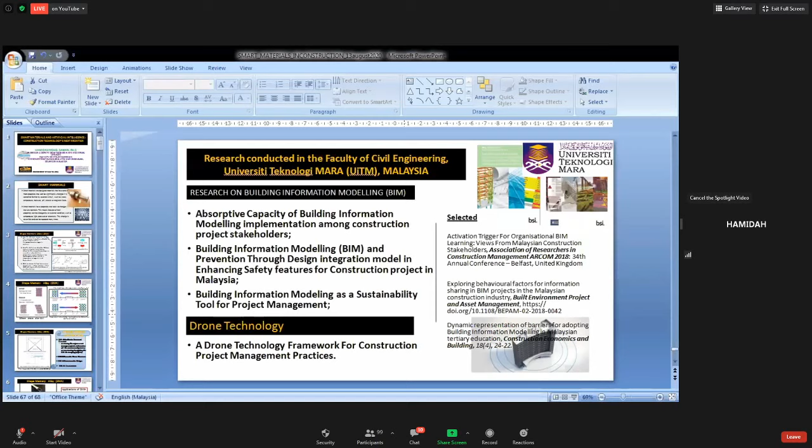Now, okay, can everybody see my slide? Yes, clear, Prof.

Clear, okay. So I would like to share small fractions of innovative materials and methods that have been made worldwide that have opened new doors for improvement in the construction industry, particularly in concrete construction in the Greenation era.

Good afternoon, ladies and gentlemen, everybody. Smart materials are defined as materials that have one or more properties that can be significantly changed in a controlled manner by external stimuli such as stress, temperature, moisture, pH, electric or magnetic fields. Smart construction materials are also known as intelligent, active, or adaptive materials.

One of the smart materials is shape memory alloy, or the acronym SMA. SMA has two unique characteristics.

One is a shape memory effect, and another is super elasticity, or known as pseudo-elasticity. SMAs are alloys that can return to their original form, shape, or size when subjected to thermomechanical or magnetic variations.

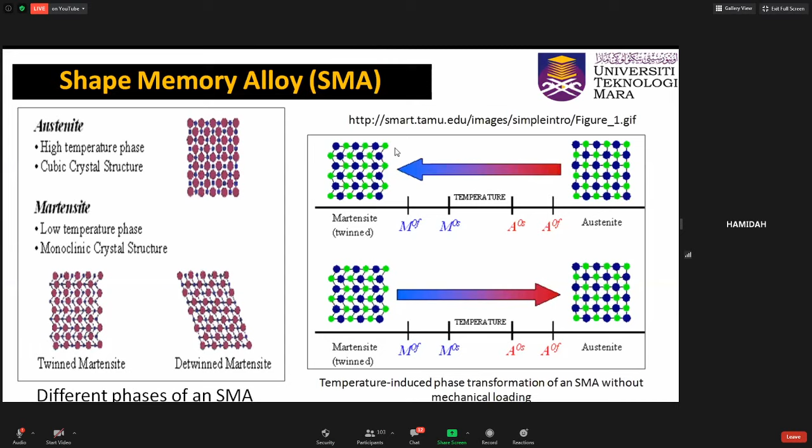Therefore, SMAs are still considered expensive materials. SMA find their application in civil engineering, specifically for seismic protection.

To date, SMAs have been applied in concrete structures to enhance shear resistance and reduce crack width for bridge girders. Nickel titanium shape memory alloy wires have been used to repair and strengthen heritage structures. SMA is also suitable for bridge restrainers that prevent excessive movement in bridge supports during a severe earthquake.

Another application of SMA in construction is as a base isolator. The SMA isolator usually provides energy dissipation and restoration after unloading. The isolators are installed between the superstructure and the ground to assemble an uncoupled system. Therefore, the damage of the superstructure is minimized.

SMA can also be embedded in concrete structures to reduce permanent deformation.

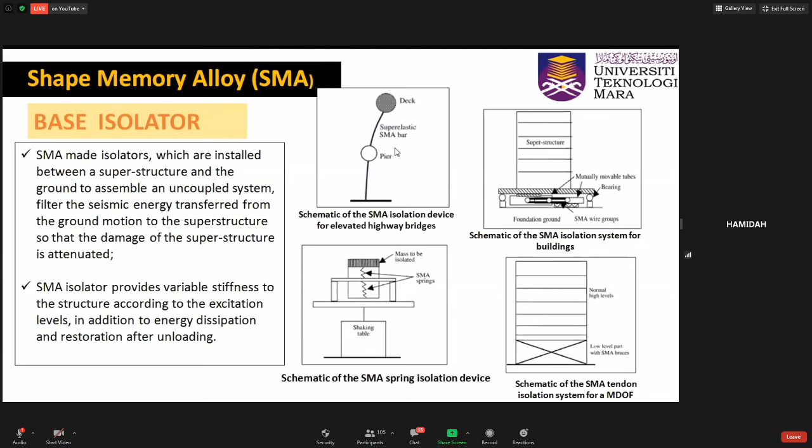Concrete has gone through evolution and revolution since the establishment of ordinary Portland cement in the 19th century. In the 1980s, use of blended cement became of interest to numerous researchers, with studies on the behavior of blended cement utilizing waste byproduct ash and aggregates, and at the same time self-compacting concrete was introduced. In the late 1990s, ultra-high performance concrete, also known as reactive powder concrete or RPC, was invented by a group of researchers from France.

Recently, categories of self-sensing, self-cleaning concrete using nano-sized particles, and translucent concrete under the term smart concrete have been topics of discussion. An example of self-sensing in ready-mix concrete is real-time concrete strength monitoring.

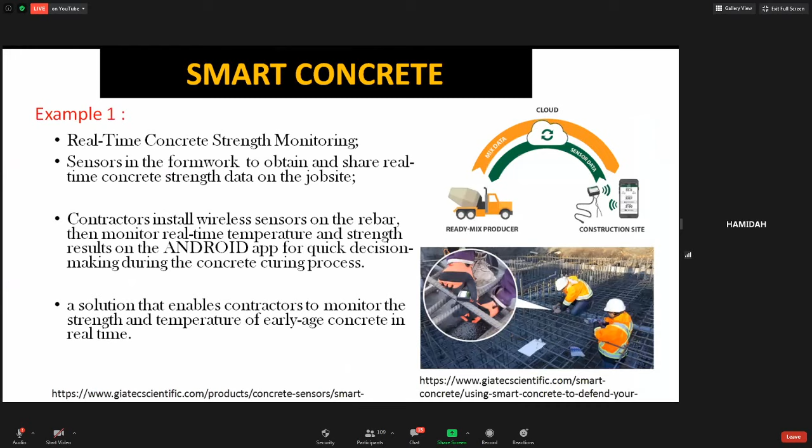Wireless sensors are installed in the formwork to obtain and share real-time concrete strength. Concrete incorporating carbon fibers or carbon nanotubes can also be used to sense strain, stress, crack, or damage by itself.

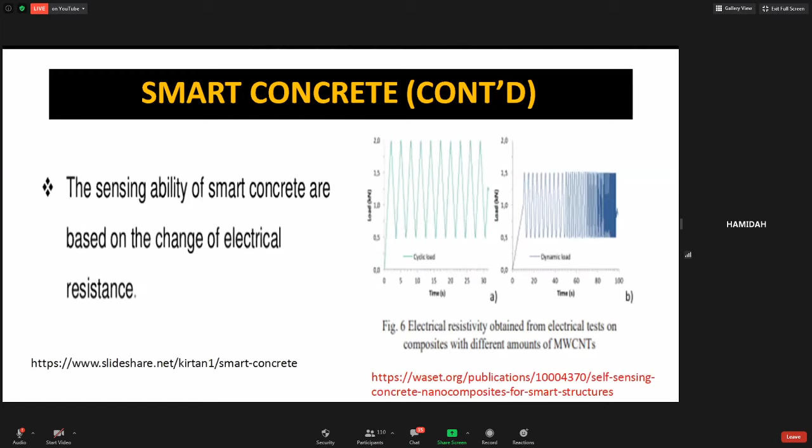The sensing ability of smart concrete is based on the change of electrical resistance. Carbon fiber has been proved to be one of the most effective ways to improve electrical conductivity, and is therefore embedded in hydrated cement paste. Carbon fiber in concrete can act as a self-sensing sensor through electrical resistance change.

Self-sensing concrete can also be used to monitor traffic flow and reduce congestion, and this can be done by integrating a signal from self-sensing concrete with an intelligent transport system.

In cold countries, self-sensing concrete can melt snow, as an alternative to using de-icing salts, which create many issues mainly around corrosion of steel reinforcement. The concrete is integrated with resistive carbon nanofiber paper, and heat will transfer to the surface through conductive concrete.

Nanotitania can disintegrate organic pollutants into harmless CO2 and water in the presence of light, making buildings stay cleaner and more beautiful.

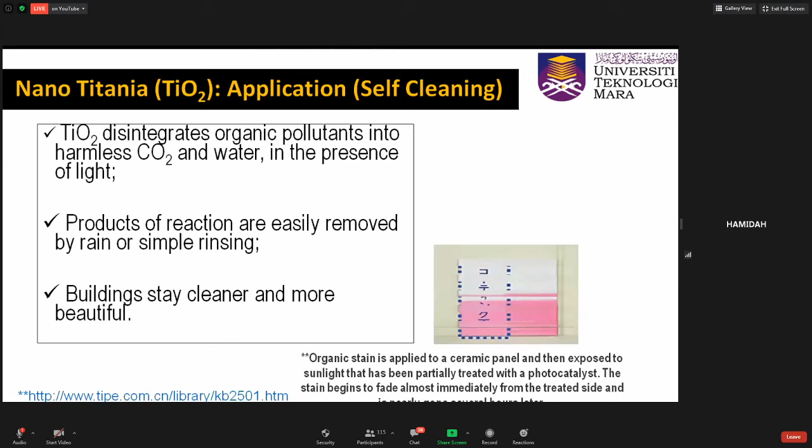Nanotitania acts as a photocatalyst for coatings that can preserve paint color for years and produces self-clean surfaces.

Meanwhile, Prof. Henk Jonkers and Prof. Eric Schlangen from Delft University, Netherlands, in the early 2000s had noticed that bacterial activities tend to self-heal by generating calcium or calcite precipitation, and their bioconcrete would have encapsulated bacterial spores that would be activated when cracking takes place.

It is a special type of concrete. Bioconcrete and self-healing concrete is formulated to increase durability and lifespan through continuous healing action. The bacterial species produce urease, which catalyzes urea to produce CO2 and ammonia, resulting in an increase of pH in the surrounding area, where ions of calcium and CO3 precipitate as calcium carbonate, also called calcite.

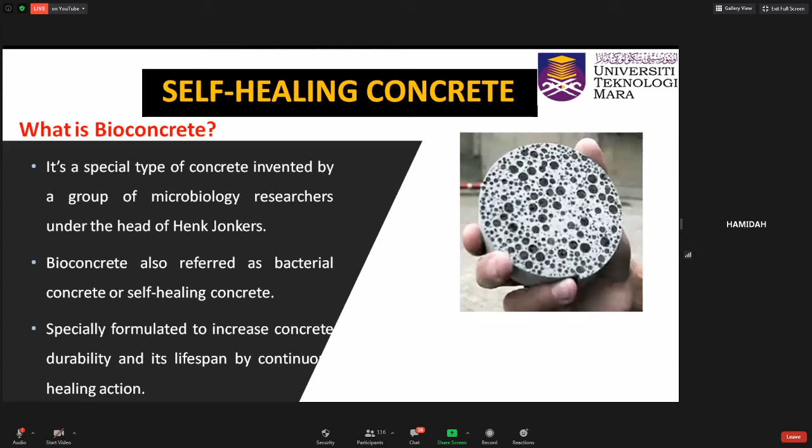Bioconcrete leads to sustainability because microorganisms can be regrown, and it is a new way to design durable concrete structures. The beauty about bacteria is that they become dormant in spore form when water and food are depleted.

But when the bacteria receive food and water, they will revive and become active, even after millions of years in a dormant state. With the introduction of nutrients and the availability of oxygen, bacteria can precipitate calcium carbonate to fill the microcracks. This technique is also called microbiologically induced calcium carbonate precipitation, or MICP.

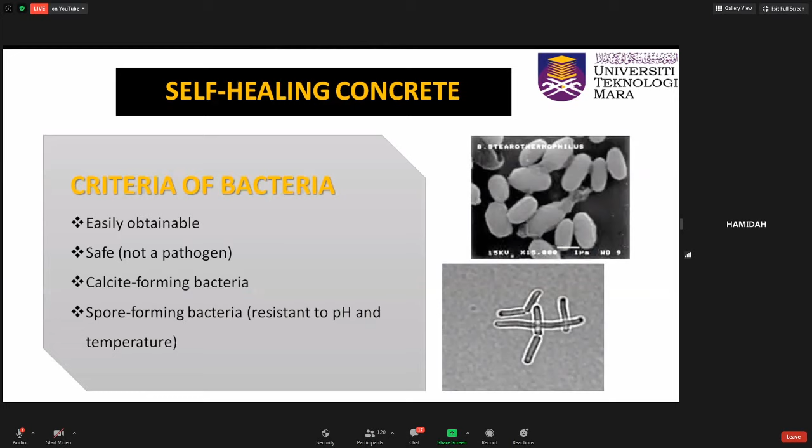Bacteria used for self-healing must be easily obtained, safe, calcite forming, and spore forming, and resistant to pH and temperature. The calcite formed from bacteria will fill up the voids in between the aggregates.

This is the illustration that can be made when calcite is formed in concrete. Ingress of water through cracks activates the bacteria, converting nutrients into minerals, locally clogging the crack to regain water tightness.

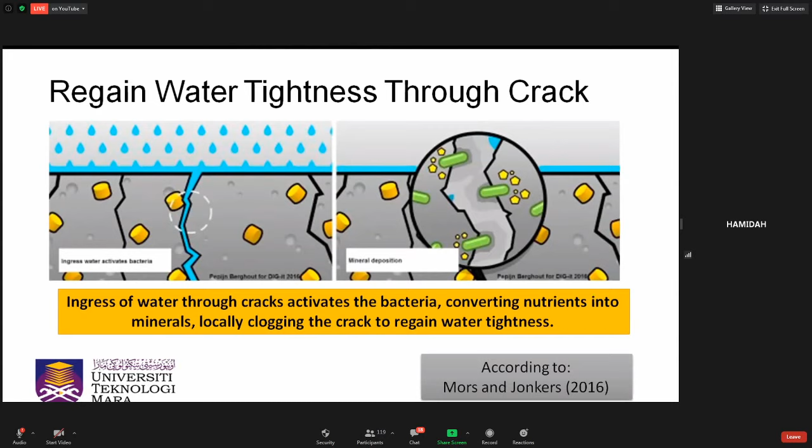Another method of self-healing is by using polymer catalysts. When cracks occur, microcapsules containing polymer healing agent break and release the healing agent. The healing agent contacts catalysts also embedded in the materials, causing polymerization and filling up the cracks.

Research has been conducted in the Faculty of Civil Engineering, Universiti Teknologi MARA, on self-healing concrete using Geobacillus stearothermophilus encapsulated in alginate gel. The encapsulated bacteria was mixed in concrete and artificial cracks were introduced. It was observed that the cracks will fill up in 60 days.

The study showed that encapsulated bacteria can heal a maximum crack width of 0.97 millimeter compared to direct incorporation of bacteria, where only smaller crack widths can be filled up.

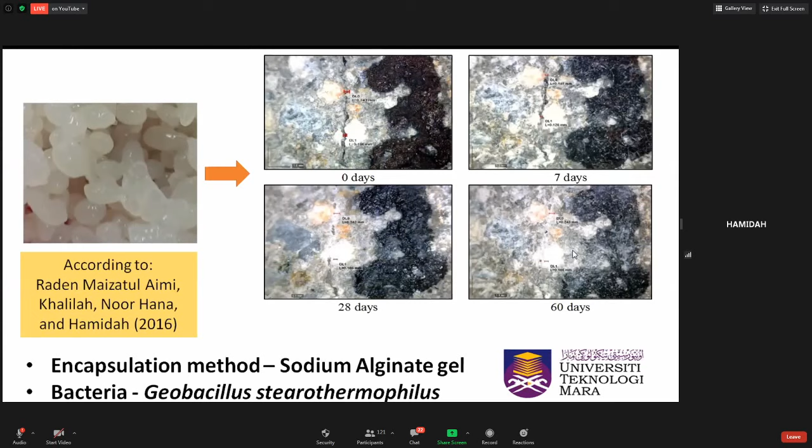Meanwhile, nanoconcrete is defined as concrete made by filling the pores in traditional concrete using nanoparticles of size less than 500 nanometers. The nanoparticles will provide special performance.

Carbon nanotube possesses superior mechanical properties, besides its very low density, making carbon nanotube one of the popular nanomaterials selected to be incorporated in concrete.

Nanomaterials are categorized into two: graphene and nanoparticulates. Graphene includes carbon nanotubes, or CNT, and carbon nanofibers, or CNF. Meanwhile, nanoparticulate materials include titania, silica, calcite, and clay.

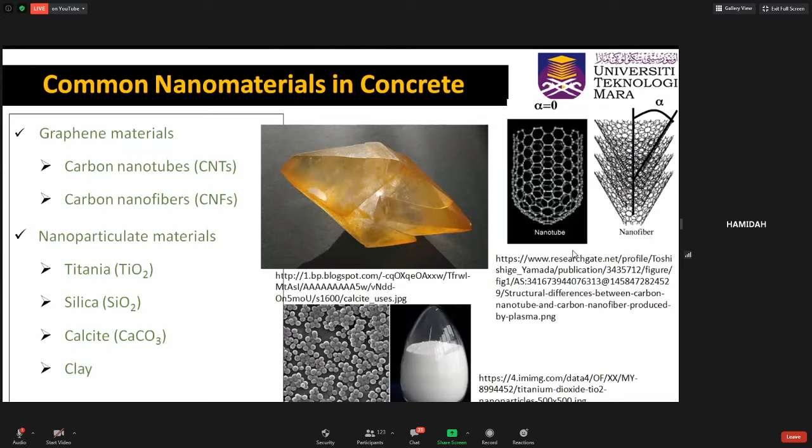Graphene is a monolayer of carbon atoms packed into a honeycomb lattice. Graphene layers can be wrapped into perfect cylinders.

Carbon nanotubes, or CNTs, have a diameter of 1 to 2 nanometers and length up to 18 centimeters. They have extraordinary strength and excellent electrical and thermal properties, making CNTs the best of known materials as compared to high-carbon steel.

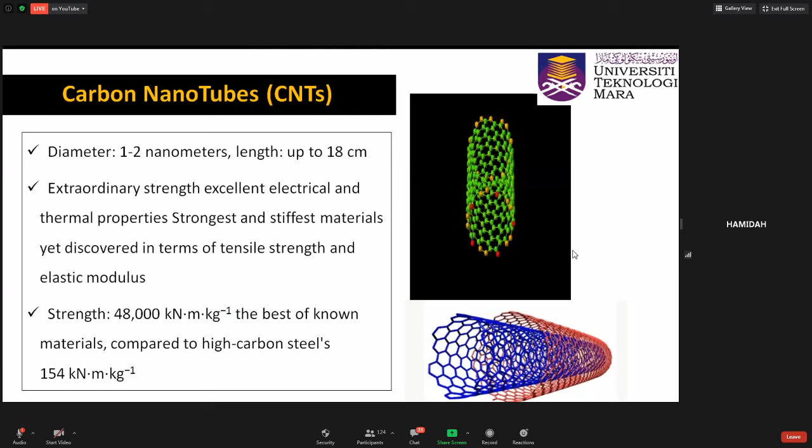CNTs fit many applications in infrastructure. CNTs have strength hundreds of times that of steel and can be employed as rope in suspension bridges. Some scientists are even working on a space elevator that uses a CNT rope to take us all the way up into space.

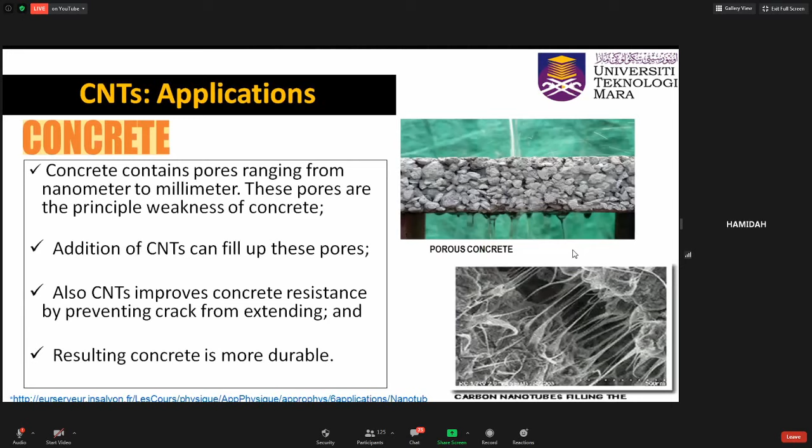CNTs have been used to fill up pores in concrete ranging from nanometer to millimeter size, resulting in more durable concrete. Owing to greater strength and lesser density of CNTs, it can offer an excellent replacement to conventional steel in cable-stayed bridges.

Carbon nanofibers, or CNFs, are fibers with diameter in the range of 10 to 80 nanometers. CNFs are cylindrical nanostructures with graphene layers arranged as stacked cones, cups, or plates, or even as coils or ropes.

Besides, it can be a photocatalyst as a self-cleaning agent. As mentioned earlier, nanotitania, when exposed to UV light, will create hydroxyl radicals and superoxide ions, which are very strong disinfectants as a cleaning agent.

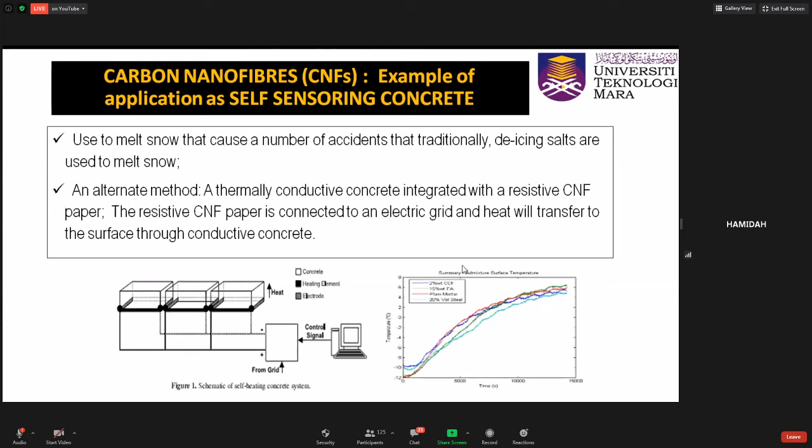Nanosilica, because of its cheaper cost, is the most commonly used. Silica is found in nature as sand. Nanosilica particles range from 10 to 20 nanometers. When incorporated in concrete, nanosilica would fill the pores at nanoscale, resulting in increased compressive strength and improved resistance towards segregation.

While calcite is a common carbonate mineral, the second most abundant after silicates, the size of the nanocalcite particle exists in the range between 60 to 150 nanometers.

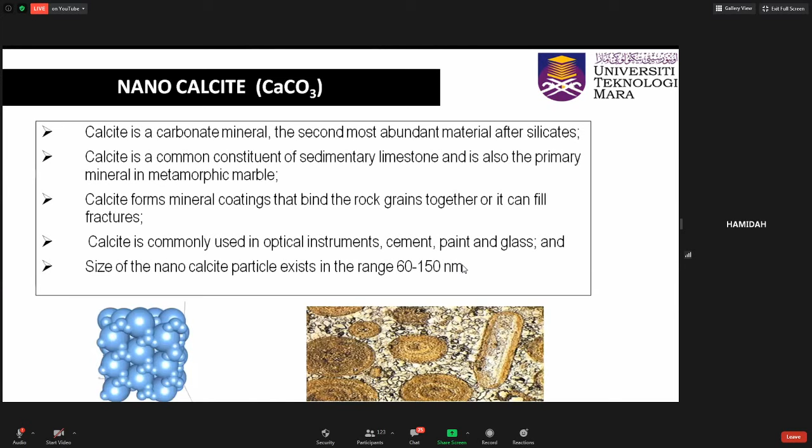Nanocalcite is a very important filler material like nanosilica and can be used in sealants and adhesives to improve stiffness, resistance, and weatherability of the resulting composite. Owing to its glassy texture, calcite also imparts glazing to paints.

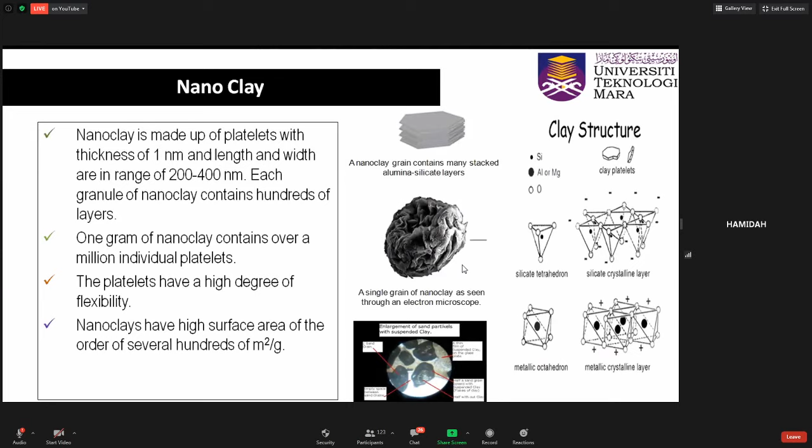Nanoclay is made up of platelets with thickness of 1 nanometer and length and width in the range of 200 to 400 nanometers. Each granule of nanoclay contains hundreds of layers, and 1 gram of nanoclay contains over 1 million individual platelets.

Nanoclay is added to concrete as a replacement of cement material. It was found that tensile strength of concrete increased by 50% if 8% cement is replaced by nanoclay. Nanoclay is also used as a rheological modifier in paints and increases flowability and plasticity when added into concrete mix.

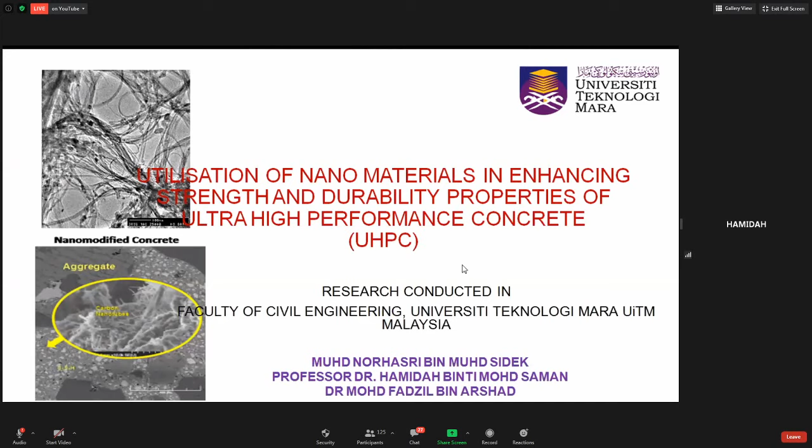Research works have been done in the Faculty of Civil Engineering, Universiti Teknologi MARA, UiTM, on utilization of nanoclay in producing ultra high performance concrete, or UHPC. A series of trial mixes were experimented to determine the optimum formulation with high workability UHPC, incorporating nanometaclay and nanometakaolin.

It is an objective of the study to establish ultra high performance concrete made of nanometaclay or nanometakaolin with water curing but able to achieve similar strength as UHPC made of other materials cured in elevated conditions. The function of nanometaclay or nanometakaolin is obviously to fill up pores at nano size in concrete.

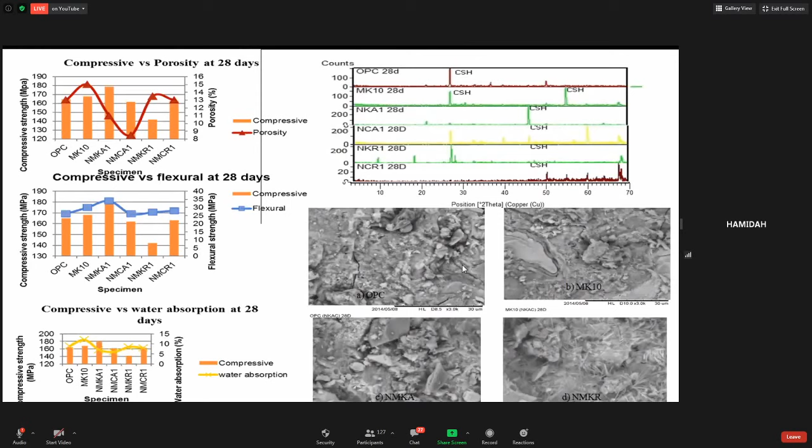The results show that nanometaclay has flaky and granular morphology. It shows that 1% nanometakaolin is enough to boost the compressive and flexural strength to maximum level of the UHPC prepared. Interestingly, the compressive strength achieved is equal to those made with higher cement content cured under heat treatment, when nanometaclay or metakaolin is included in UHPC.

Similarly, flexural strength obtained is equal or higher despite the lower cement content used. It is confirmed that inclusion of 1% nanometakaolin and 1% nanoclay enhanced the compressive and flexural strength, and both strengths were achievable from UHPC specimens cured in water.

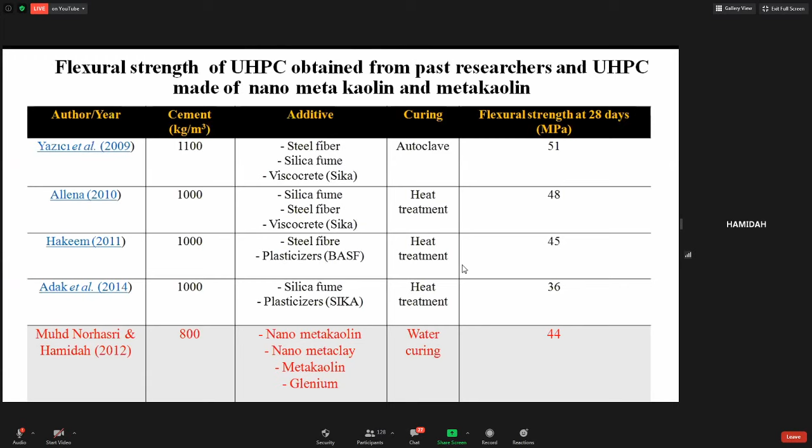Another smart material is translucent concrete, another example of smart concrete. It is also called transparent or light-transmitting concrete.

It is achieved by replacing aggregate with transparent alternative materials, for example clear resins and other types of resin. Translucent concrete was originally developed in 2001 by a Hungarian architect.

Transparent concrete is manufactured by using a combination of fiber optics and fine concrete. These fibers are blended into the concrete like any other aggregates.

These optical fibers can transmit light from natural and artificial sources into spaces enclosed by the translucent concrete panel.

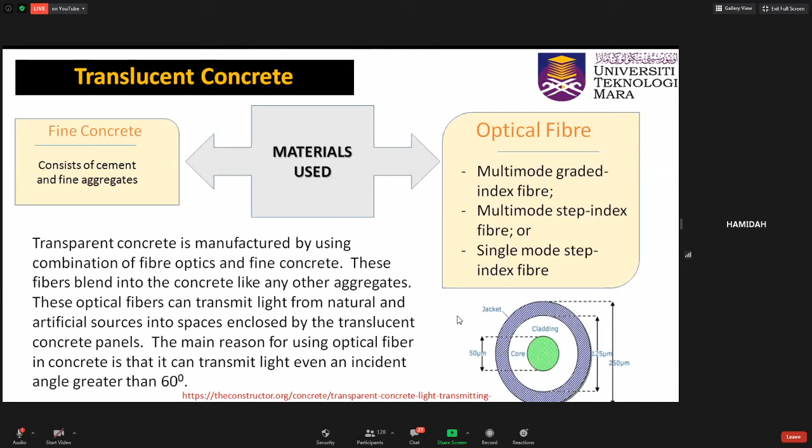The main reason for using optical fiber in concrete is that it can transmit light even at an incident angle greater than 60 degrees. Optical fibers in concrete act like slits which pass light throughout the concrete.

Translucent concrete offers many advantages such as a good aesthetic view to the building, and it saves energy costs if sunlight is used as the light source instead of electrical energy.

It can also be used in cold weather countries to transmit heat with sunlight.

Artificial intelligence, or AI, assists humans and does not replace them. AI uses the power of machines to model the natural intelligence of humans.

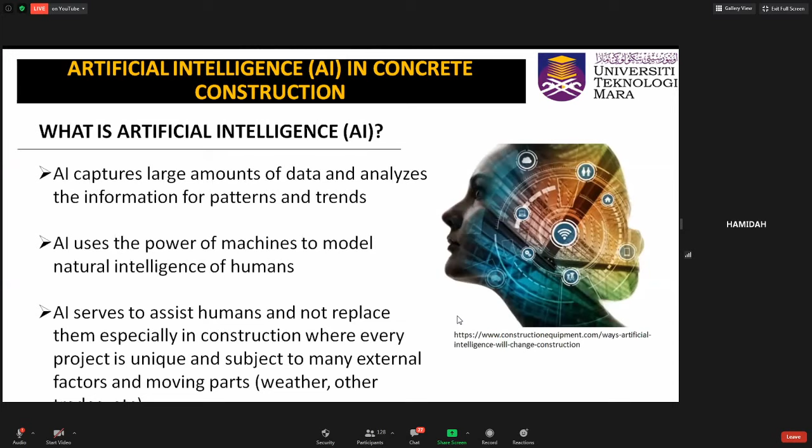For example, drones provide easy access to monitor construction sites and workers at large and difficult or complex areas.

A drone can gather images, aerial data, and mapping information, and is used to capture 3D modeling for building information modeling, or BIM.

BIM creates a shareable digital description of every aspect of the structure, which all necessary stakeholders can update.

BIM offers solutions regarding cost estimation, design workflow, life cycle management, streamlined information, documentation, and also maintenance.

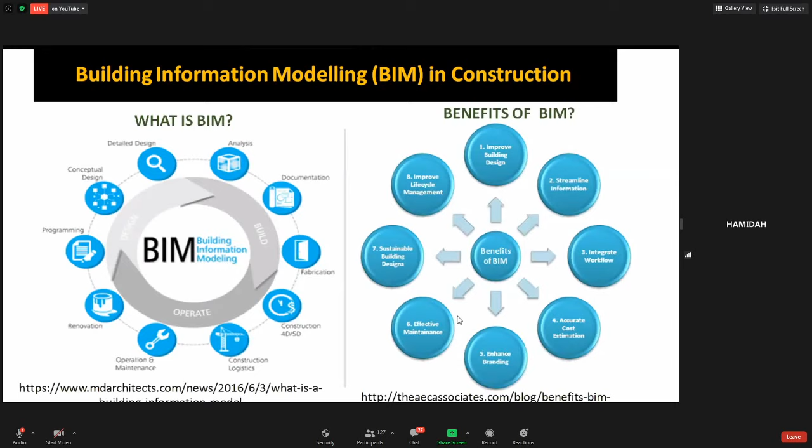A few research projects in relation to drone and BIM are ongoing in the Faculty of Civil Engineering.

We have a group of researchers conducting research on BIM and drone technology, and a few papers have already been submitted and published in the journal, a high impact journal.

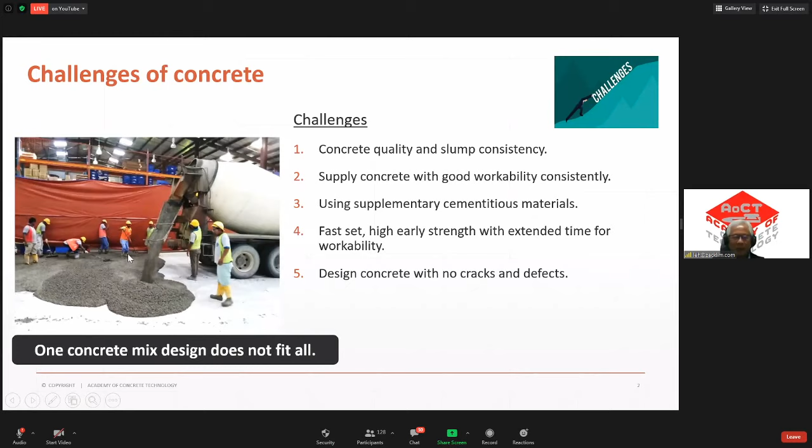I'll talk about some of the advantages and disadvantages on that. Today everybody wants their job to be done fast. And the final thing is a little bit on the mix design of concrete, where if you can have no cracks and defects, maybe just now with all the nanoparticles mentioned by Prof. Hamidah, might make it very interesting for the students to look into the research. So the first challenge is concrete quality and slump consistency.

What I mean here is I'll show you a video of a concrete floor. A concrete has been supplied for us to do a floor. And if you look at the video, certainly this concrete is really, really wet, all right? This concrete actually looks like a self compacting concrete or self flowing concrete.

So I always say that you're getting it at the same price as a normal concrete, but ended up you get, but it's not the true self-compact or self-flowing concrete, it's just such bad concrete. Sorry, I hope you can hear me. Some interruption.

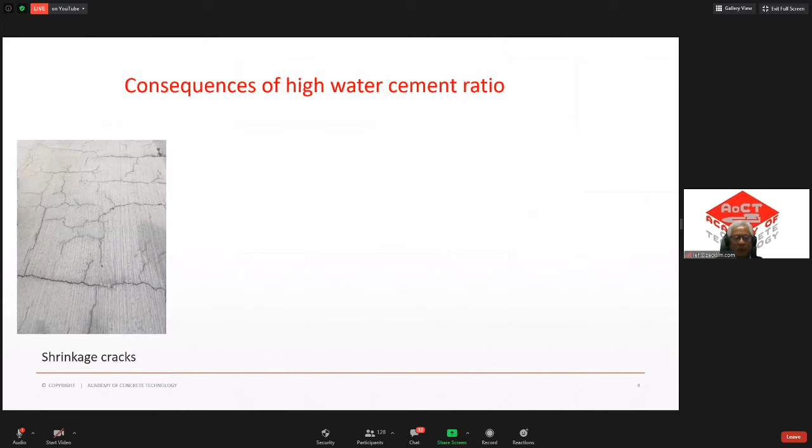Yes, we hear you. Okay, all right. So these are the consequences of a high water cement ratio. The first thing is shrinkage crack. As you know, shrinkage crack would always come many months later, because the water escapes from within the concrete, and that's where the stress and strains will build up within the concrete. And being the concrete very young, it might not have the strength to fight the stress and all that. So that's why for sure, any wet concrete delivered to the job site will have a lot of shrinkage crack. The second thing could be craze crack.

You see a lot of spider cracks on the surface. And this is not so much caused by the water, but because when it's so wet, most of the time the workers have to sprinkle cement on the surface. One way of sprinkling the cement is to suck up the water so they can go in and finish off the job early. So when you have too thick a paste, due to the difference of drying or the temperature, the skin or the surface will always dry up much faster than within. As a result, it's due to the differential of shrinkage, that's why you have a lot of these cracks on the surface. But all these are not actually structural, it's just aesthetic. It doesn't look good, but it will never actually peel or delaminate.

It's just unsightly. So the third thing is actually the surface can be very dusty and weak. You got very low abrasion resistance and all that. And of course finally, your compressive strength would definitely drop, as you know. The more water you have in concrete, for sure your strength would definitely drop. So these are the consequences of having very, very wet concrete.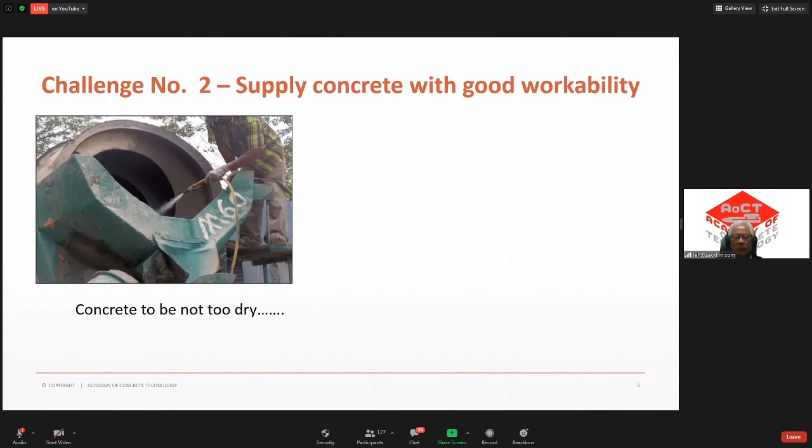They add water. So these are the earlier batch they have done, looks good, workable. And this is after adding water, you can see how wet the concrete is. So beside all the consequences I mentioned earlier, sometimes because this concrete has already started, it will definitely set much faster, and being wetter, it will definitely set slower. As a result, you might have what we call a cold joint.

Normally, cold joints are caused by disruption or delay of concrete supply. Let's say you place this concrete, and after 2 or 3 hours there's no supply, then the fresh one comes in. The fresh and the old hardened concrete would not intermix. As a result, after many months, as the concrete starts to shrink, you tend to have a crack line appearing there. So these are the reasons why you need very good workability of the concrete, so that the workers don't add in water.

The third challenge is, as you know today, all these supplementary cementitious materials - the common ones are fly ash, slags, and silica fumes. Especially for students, you know that all these ashes are based on the dump site, and today they're used to substitute the cement. So with all these supplementary cementitious materials, you actually enhance properties of the concrete.

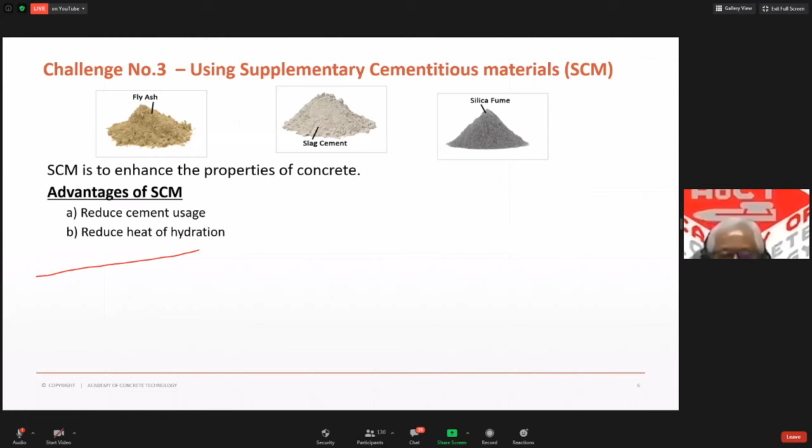The second thing is it actually reduces heat of hydration, especially when you're doing very thick slabs - maybe about a meter thick. So when you do any thick concrete using OPC, what happens? The heat of hydration - the core of this slab, I'll show you in the next picture. For example, you're doing a pile cap, it could be 1 meter thick, or even a basement slab. What happens when you're doing such a thick slab using OPC is the heat generated within the center of the core can probably easily reach 70 degrees C. And your ambient temperature, let's say, is 30. So there's a difference of 40 degrees C.

As a result of that, you will get thermal cracks. Most researchers say that if you got anything more than 25 degrees C difference between the core of the slab and the ambient temperature, you will have thermal cracks happening.

Besides that, another type of crack can happen, called delayed ettringite formation. As you know, during the cement hydration process, a lot of these ettringite, which are kind of like crystals, start to develop. But sometimes it delays the ettringite from forming. So what happens is that after many years, around 10 years or so, in the presence of moisture, this ettringite, when in contact with water, that's where they will start to crack. That's a little bit why adding all these SCMs would definitely help with thermal cracks. At the same time, it will also create cracks - I'll talk about that later. So these are always the plus and minus points of it.

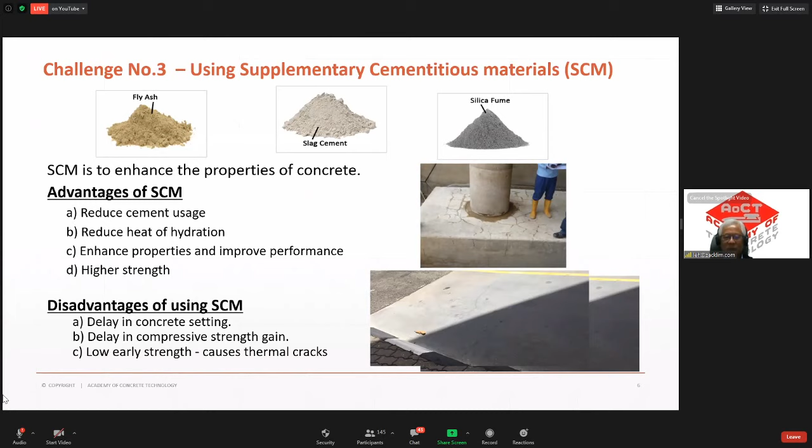The other thing is it's very costly. For normal concrete, 1 meter cube might cost like 60, 70 USD. For high strength fast set repair concrete, it might cost as much as 2,000 USD per meter cube. So we see the big difference.

And of course the third thing is there's a lot of demand, because everybody wants to do their work faster. They want to turn over their formwork, especially the precast people, so there's a lot of demand for fast set concrete. But because of the price and fast setting, I always tell researchers they should work on this type of fast set concrete not only for repair but for new projects too. The latest I heard is that researchers can do like 20 MPa within 8 hours, and the price is only about 1/4 of what I mentioned, so I hope you all continue looking into this research.

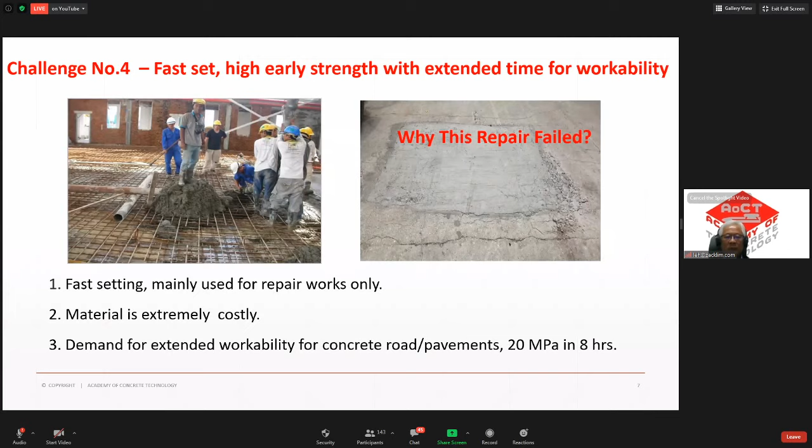So try to use as low water cement ratio as possible, right? And you all know very well that if you don't have enough water, you also will cause autogenous shrinkage cracks. So playing around with this, what we found is for the mix design, if you can keep your water between 145 to about 180 kilos per meter cube. That's subject to your cement again, and that's very important.

Another thing, even too much cement could be bad, because we always try to cap our cement content below 400 kilos per meter cube of concrete. The reason is if you've got higher cement than that, it might cause curling of the floor slab. The slab will actually curl up. So that's another type of defect.

So the second thing you should do is add in a shrinkage compensating agent, right? It could come in liquid or powder form. What this shrinkage compensating agent does is, when you add it into the concrete...

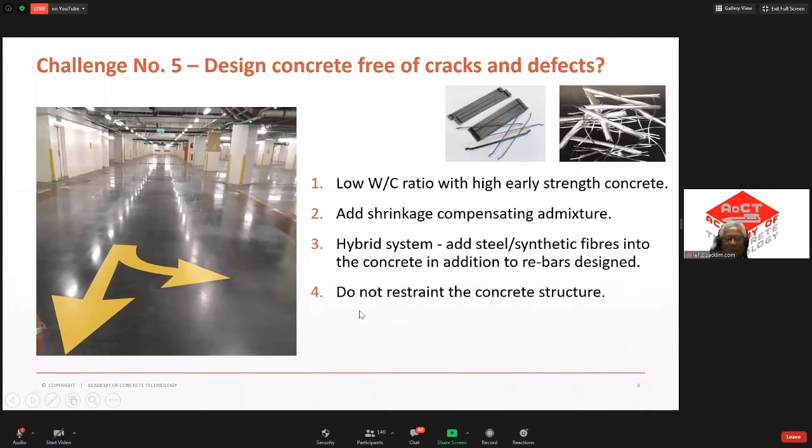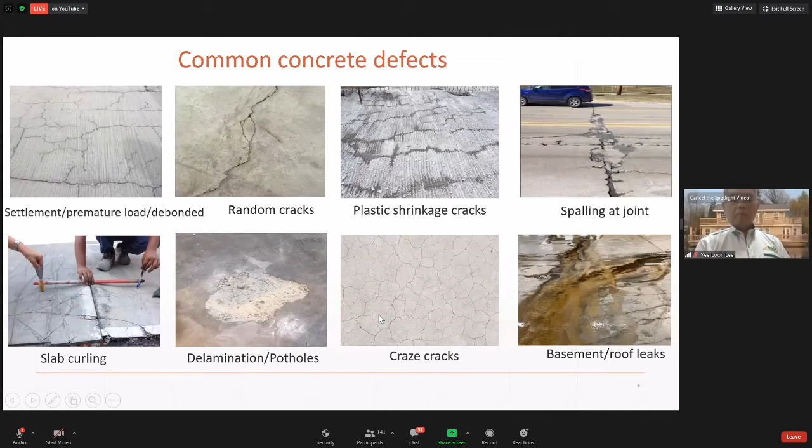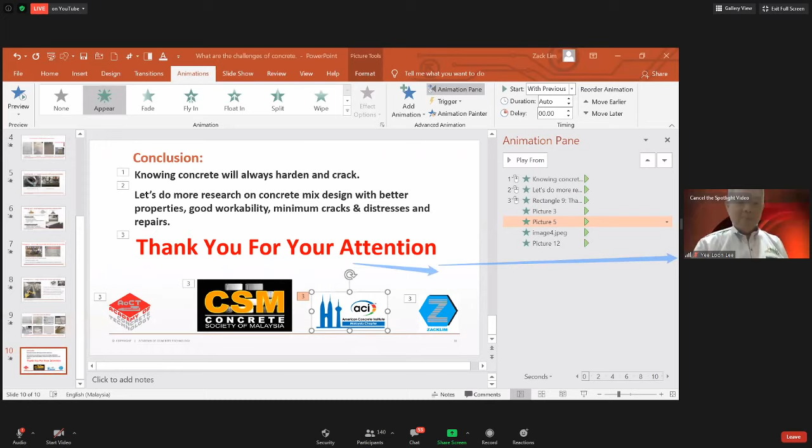Thank you for your very good and valuable presentation. I have one question: translucent concrete is really very good in terms of its use in dark areas, basements, and many other areas, but I would like to know to what extent the fibers used in this concrete create an impact on its strength. What type of fiber is used for translucent concrete? How do these fibers affect the strength of the concrete?

Frankly speaking, this is an area where I'm interested and I'm still doing a review because I haven't started any work yet. But based on my literature review, it says that optic fiber is used. There are a lot of optic fibers, and this optic fiber is put inside, slit inside the concrete, and it can produce light inside the concrete.

My interest was to know whether these optic fibers create some contribution, positive or negative, towards the concrete's strength. That was the question. Frankly, I haven't looked into the effect of this optic fiber on the concrete properties yet. Thank you very much, Dr. Arif.

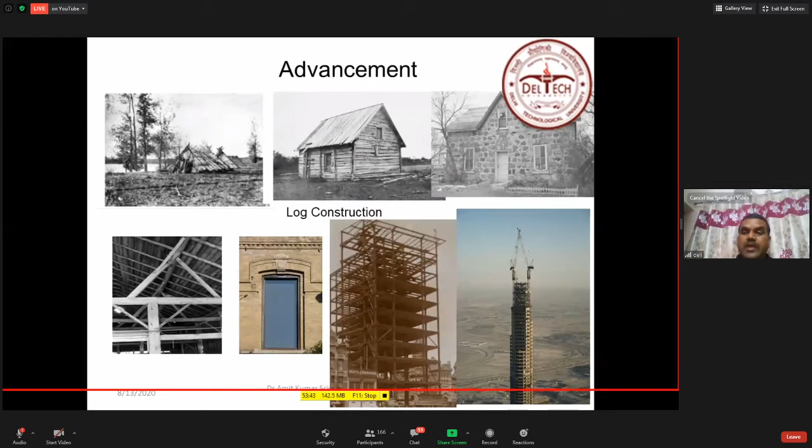Advancement is bound to happen; it is the law of nature. As people were advancing, our construction industries were also advancing, from the log to brick masonry or stone masonry structures, wooden structures, then to steel structures and concrete structures. Even though steel structures perform better, in India concrete structures are more preferred, and I may not be wrong if I say this is true worldwide too. Concrete structures are more in demand and use because of flexibility, ease, and the trained manpower available in this area.

Since I am talking about Indian case studies, let's look at world cement production in 2018: China is first with 57.3% of resources, and India comes next with 6.2%. China is the world's largest cement producer, and India's production is about one-tenth of that, at 6.2%. We are the second largest producer and user of cement in India, which is not surprising because we are a developing country with high cement demand.

As I said, more and more we are going for construction using reinforced cement concrete, so more and more cement demand is there. We are at the second position in the world.

Similarly, if you see the share of different industries in carbon dioxide gas emissions, the cement industries alone are producing 6.9% of total global carbon dioxide emissions. If you see all the trucks in the world, they are producing 6.1%. It means the cement industry is producing more carbon dioxide than all the trucks on the road produced in 2017.

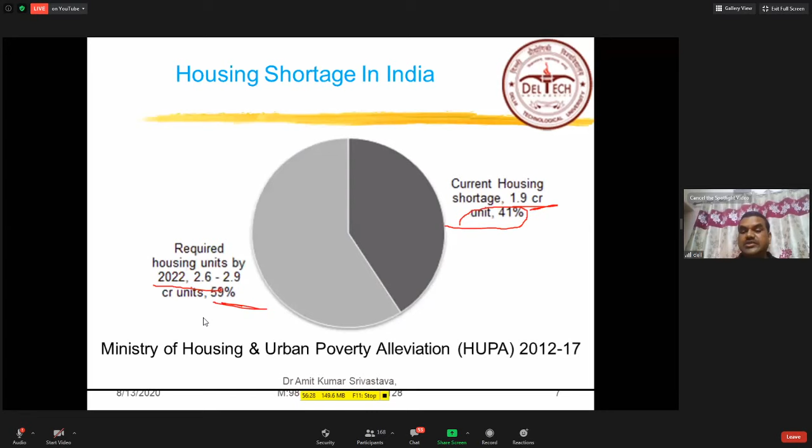Now you see, we have a 59% shortage, and as I said, mostly we are going for concrete structures. And if I'm going for concrete structures, lots of carbon dioxide gas emissions will be there. This is the background of my study.

Then we will discuss what sustainability is. As you know, the World Commission on Environment and Development in 1987 defined sustainability as that which meets the needs of the present without compromising the ability of future generations to meet their own needs. So what I want to say here is that we should not exploit our natural resources in such a way that our coming generations will be deprived of them.

Our cement, because in India we are having a shortage of raw materials to make good concrete and good cement, and sometimes we are procuring and importing it from Pakistan, China, Korea, and so many other places. And 59% of the development we still have to do, so we are lagging also. So now, how do we use this precious material in such a way that I can preserve it for future generations, and what methods can the cement concrete industries implement to reduce its use? That is the topic I'm going to discuss today.

So now, how can I achieve sustainability in construction? The best way is to use less and work more—less quantity, more work, will probably be the better answer to this question. If I use less quantity while achieving more, our carbon dioxide gas emissions will also be less, and moreover, I can preserve these beautiful raw materials for coming generations. I'm afraid that if we don't do this, coming generations may see cement only in a museum.

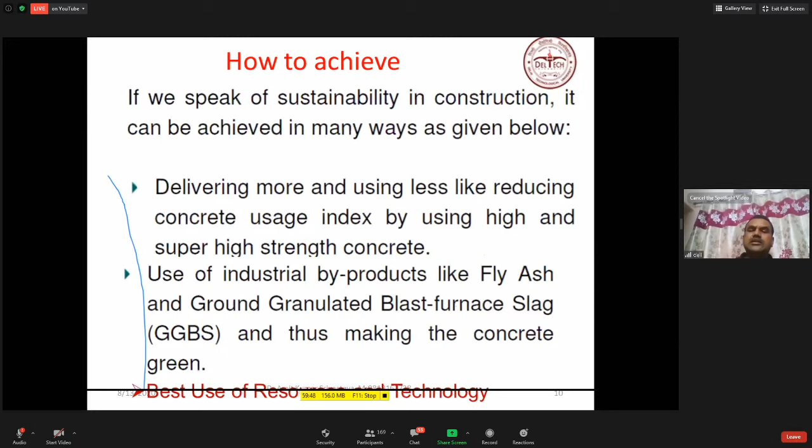After all, whatever you are doing, you have to have the best resources and best technology to use it. If you design properly and use very good quality material, but the handling at sites is not good, you are not going to achieve anything. So you have to use the best technology and resources.

Now, if I come to this slide, you see how to achieve it: reduce, reuse, recycle, and recover. These are the four principles of environmental engineering, and mostly the concept I'm going to discuss here is reduce and recycle. I'm preventing material from going into landfill sites, so I am trying to use waste material for concrete production.

So what I want to reduce here is the use of potable water used for concreting and curing. We have scarcity of good drinking water, and whatever water is required for making concrete and for curing needs to be good quality water. So how do we reduce the water requirement in concrete, and then reduce the use of raw materials like ordinary Portland cement, and use proper technology so that implementation is better and structures are defect free.

Now I will give a brief idea, because I think some students or research scholars are also there in the presentations from India and from different parts of the country. So I just want to discuss the different cement manufacturing processes.

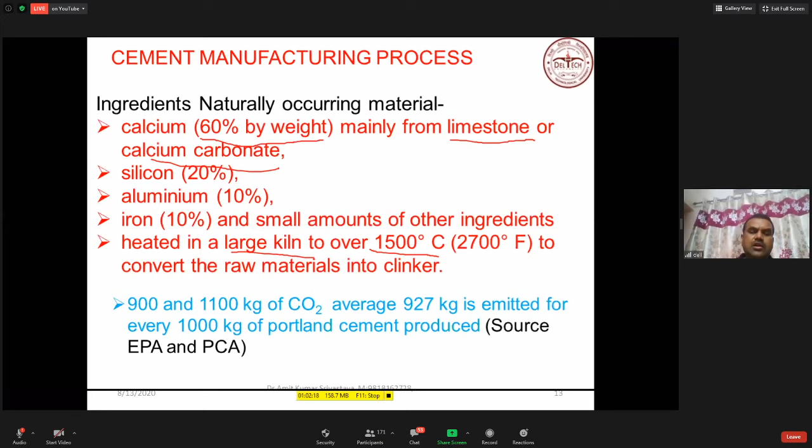And during this process, what happens? There is too much carbon dioxide gas emission. Research, and even our universities, are finding out the carbon index of every material used in buildings or infrastructure projects. Research says that about 900 to 1100 kg of CO2 is produced, about 927 kg of carbon dioxide gas is emitted.

So if I produce about 1000 kg of cement, I'm going to produce about 900 to 1100 kg of carbon dioxide gas emissions. So on average, about 927 kg is emitted for every 1000 kg of Portland cement. If I generalize it, I can say 1000 kg of Portland cement will produce roughly 1000 kg of carbon dioxide gas. It means 1 kg of cement produces about 1 kg of carbon dioxide gas. So if I save 1 kg of cement, I reduce the burden of carbon dioxide emissions by 1 kg. It is nearly an equal ratio.

Whatever cement you use, a similar amount of carbon dioxide gas is going to be emitted. How much carbon dioxide gas will be emitted depends upon the technology and what type of fuels are used in the process. Now let's see how this carbon dioxide gas is emitted.

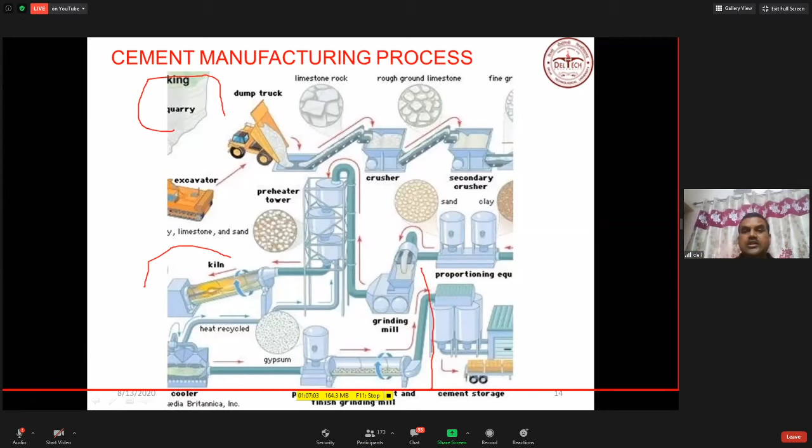Now this elaborated process causes emissions of carbon dioxide gas at the rate of about 1 kg per 1 kg of cement. Now if I want sustainable growth, if I want to reduce the carbon dioxide gas, what do I have to do? I have to reduce the use of ordinary Portland cement. And if I'm reducing ordinary Portland cement, it is not only reducing carbon dioxide gas emissions, it is also saving cost, because ordinary Portland cement is a costly material.

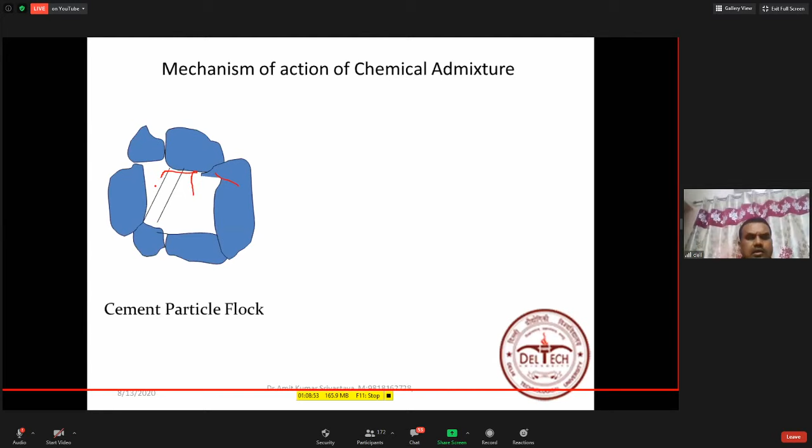Now what happens when we put chemical admixtures into this? What it does is make the cement particles negatively charged. Once the cement particles get negative charge, there is a repulsive effect, and whatever flocks are there, in these flocks, when water comes in, this water gets clogged here. This water is clogged here. So when water is clogged, what does that mean? This water is not available for the reactions.

So what happens when we add chemical admixtures is the cement particles get negatively charged and have a repulsive effect, and the water which was trapped inside the cement particles and not participating in the reactions is now released and available for the reaction. Now you see this diagram, it will explain properly how this water is getting released and becoming available for chemical reactions. This is the main concept of chemical admixtures. Various researchers have explained the same thing in different ways and different theories, but this is the easiest way I can explain chemical admixtures and how they reduce the use of water into the concrete.

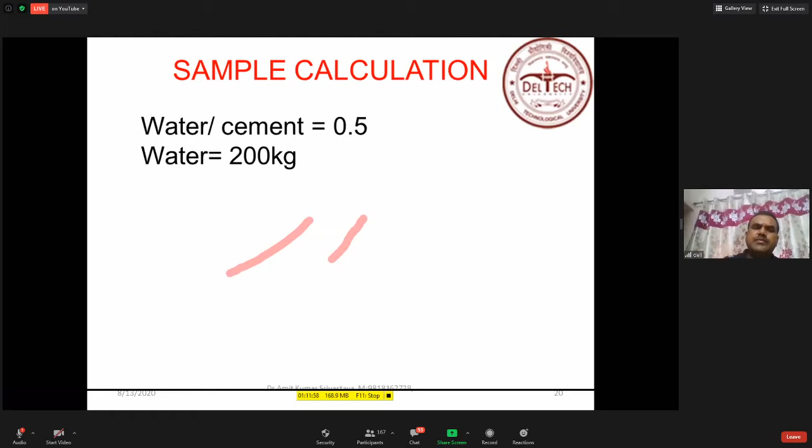So normally water required is 200 kg, I am just assuming. It depends upon the slump, the flow, what you require. It may vary a little bit, but whatever grade of concrete you are going to manufacture, for the same workability and the same slump or flow, you have to keep the water requirement the same or constant. So water requirement is 200 kg.

Now if I say the water cement ratio is 0.5, then what cement do I require? I will be requiring cement of 400 kg. Now the role of chemical admixtures comes in.

So now we add chemical admixtures. In the market, if you see, there are different generations of chemical admixtures. That is called a super plasticizer, or it is also called a water reducing admixture. Some admixture gives you water reduction of 20%. Some gives you 35%. Some gives you 40%. Or sometimes by varying the percentage of these admixtures, you can increase or decrease the water reduction.

So now if I take the water reduction as 20%, let's do this calculation: water required is 200, reduction is 20%, so minus 0.2 into 200, that is 40, so 200 minus 40 is 160 kg. If I use a chemical admixture which reduces the water by 20%, the water required will be reduced to 160 kg, and for the same water cement ratio of 0.5, now the cement requirement is 320 kg.

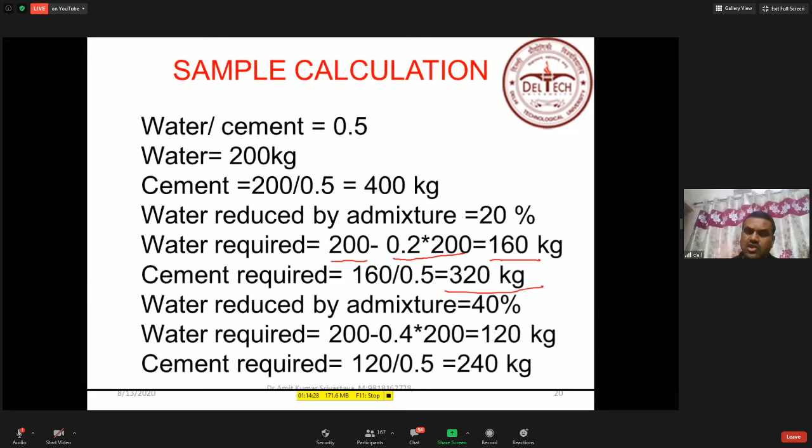Now, with the help of an example from a site, I will explain what we have done. We required a slump of 130 for a project, and we required to design M35 grade concrete. For a 130 slump, I required 201.6 kg of water. If I keep the water cement ratio as per IS code, which says it cannot be more than 0.45, for practical purposes I have used a water cement ratio of 0.41. So with 201.6 kg water and water cement ratio 0.41, the cement required is 491.8 kg.

Now similarly, if I keep calculating, what we will see is if I use chemical admixtures which can reduce water requirement by 20%, I take 201.6 minus 20% of 201.6 to get the water reduction. Once I get the water reduction and know the water cement ratio, I can calculate the reduced cement requirement. I want to present this: if I am not using any chemical admixtures, water required is 201.6 kg, cement required is 491 kg, so there is no saving.

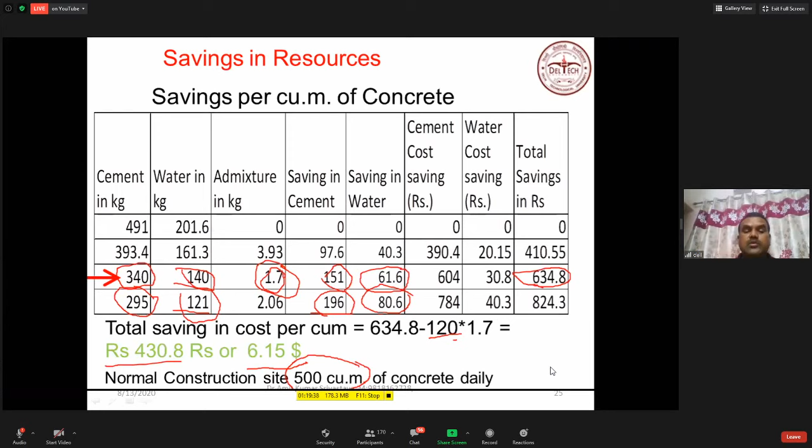And in India, I will be discussing about the case study also. Many sites I have seen are producing about 500 cubic meter of concrete daily. So if you are producing 500 cubic meters of concrete daily, you see in terms of money how much you are saving daily, and in terms of carbon dioxide gas emissions how much you are saving daily, and in terms of water, how much potable drinking water you are saving daily. So this is about the use of chemical admixtures.

Now I will go to the next part. When I add mineral admixtures to this, as our previous speakers have said, that is a supplementary cementitious material. I will also be discussing about the use of this SCM. So now the supplementary cementitious material I will be using is fly ash. It is a waste product, and it is a product we get from thermal power generation.

Now you see what happens. Here coal is there, the furnace is there, here it is burned, and after burning, the larger size particles get arrested here, and the finer particles move from here. It is the electrostatic precipitators where they are brought down, and that is called fly ash. And that fly ash from the different sections goes to silos, and this is the exhaust stack. So relatively better fumes are sent to the atmosphere.

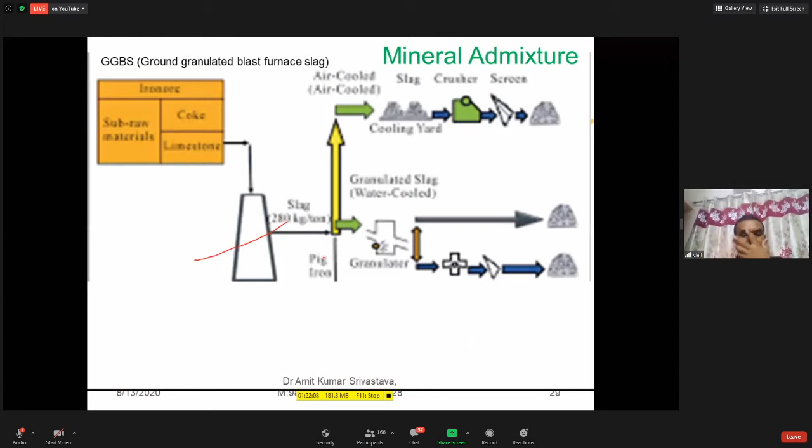So like this, we are getting the fly ash, and fly ash looks something like this. I will be discussing the use of this fly ash as a mineral admixture. Another type of mineral admixture normally used is called ground granulated blast furnace slag, which is a product of steel industries, a waste material, and it looks something like this.

Now what happens when we use this type of material? When we use ordinary Portland cement and add water, it reacts and forms a gel called CSH gel, calcium silicate hydrate gel, and they leave calcium hydroxide unreacted.

So when we put fly ash, it contains silica. As I said, Indian fly ash has a very good concentration of silica. So this free lime, when it reacts with the silica, again forms a gel, CSH gel, that is the secondary gel. So what happens? Whatever free lime is available, using fly ash creates more CSH gel, and more CSH gel means you get better concrete in terms of strength and durability.

Because this calcium hydroxide, if not used and left, will cause carbonation on the concrete, corrosion, and lots of problems. So if I am using OPC only, this leftover product is very dangerous for the life of the structures. If I use this type of fly ash material, I am utilizing this dangerous calcium hydroxide fully. Once fully utilized, it is not available for carbonation, creating durability effects on the concrete and corrosion to the reinforcements.

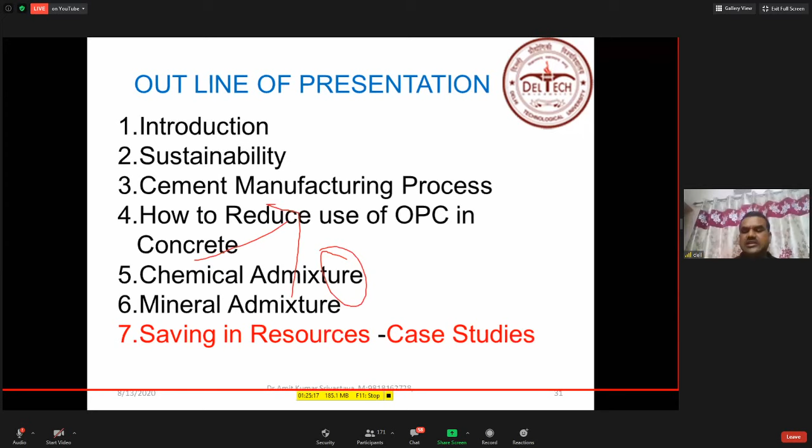So I have discussed mineral admixtures. Now I am talking about the last part of my topic, saving in resources and case studies. Our IS code says, remember, 340 kg cement I discussed. 340 kg cement, so if you add this, it will be 340.

Our IS code says you can use 30-35% fly ash if using normal concrete. If using self-compacting concrete, you can use fly ash up to 50%. So OPC 221, 119. If I use 35% fly ash or 50% fly ash, then it is 170, 170. Sometimes if I am using GGBS, our IS code allows 70% replacement. So if I replace 70%, OPC requirement is 104, and GGBS requirement is 243. We started from 491 and can reduce up to 104.

Now talking about savings: 35%, 50%, 70% savings. You can see the savings, because we started from 491. If I talk about savings only in terms of mineral admixtures, with no mineral admixture your cement was 340 kg; with 70% mineral admixture, your cement was 104 kg. So net saving in cement is about 236 kg when using 70% mineral admixture.

Now if you see cement saving where we are not using any chemical admixtures or mineral admixtures, it was 491, and if you are using GGBS, it is 104. So net saving is about 387 kg of cement, and similarly water saving of 61 kg, because mineral admixture does not reduce any water. Whatever water is reduced is by the chemical admixtures, that is about 30%, which is 61.6 kg.

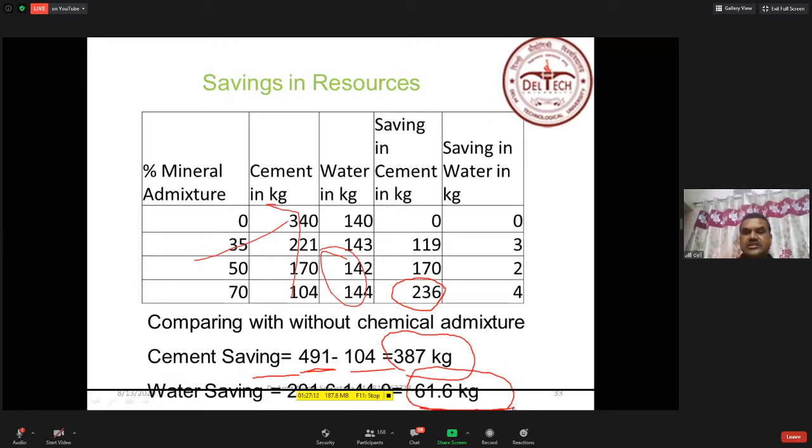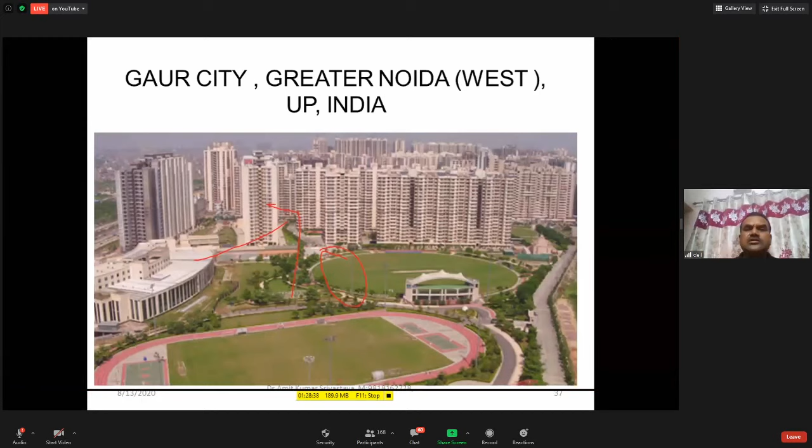So another project we have implemented is the Gaur City Greater Noida West project. As time is less, I'm not going to discuss the project descriptions, but I want to discuss that in the Gaur City project, the concrete use index is 1.41 cubic meters per square meter of area. I am using M40 self-compacting concrete there.

Annual consumption of concrete is about 0.11 million cubic meters per year. If we don't use any admixtures, the requirement was 690 kg of cementitious product. When we use chemical admixtures, it reduced to 612 kg. And when we used 50% fly ash, it became 306 kg and 306 kg.

If you see, the cost of cement, mineral admixtures, and everything is added here. So total saving in OPC cement is 380 kg per cubic meter of concrete. Extra mineral I am adding is 306 kg. So if I add the cost of everything, I get total saving per cubic meter of concrete as 24 USD per cubic meter of concrete.

Total saving in a year is $2.63 million per year. And if you see, carbon dioxide emission saving is 42.65 million kg of carbon dioxide gas reduced per year.

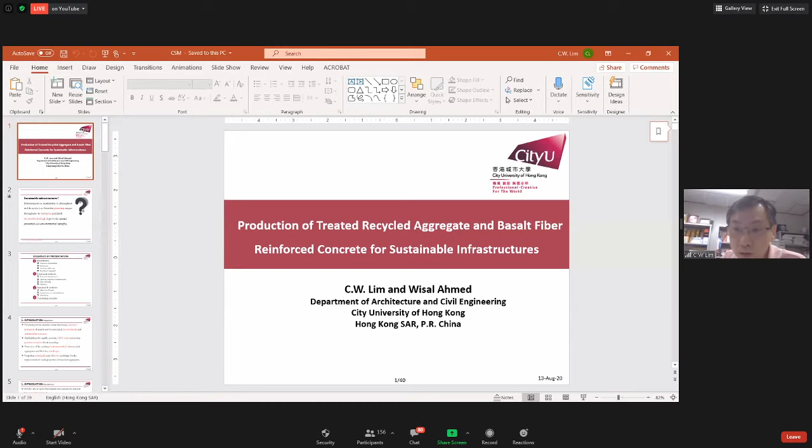Why is it sustainable infrastructure? Let me just give a very common definition. By means of infrastructure which is sustainable, it means that throughout its life cycle, from the planning stages throughout to its operation until decommissioning, it provides social, economic, and environmental benefits.

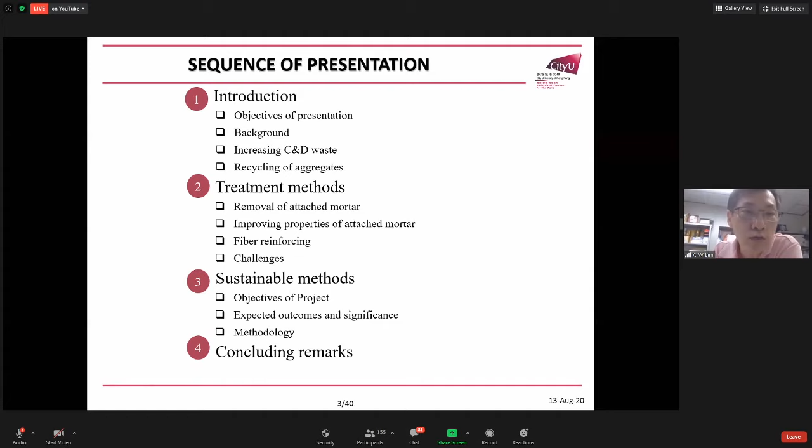This shows the contents of my presentation today. I will first give an introduction to the talk, including the objective and background, and it will be followed by treatment methods, sustainable methods, and finally some concluding remarks.

Before I begin, let me just give you some idea. This is a project which is ongoing and is not completed. So at the end of the presentation today, there will be no concrete conclusion, but it will be a general conclusion because the project is still going on.

The objective of this presentation is to present recent statistics about increasing concrete production demands and its associated environmental and sustainability concerns. We also highlight the rapidly growing C&D waste and the possible solutions for recycling. We will overview the existing treatment methods and the key challenges, and last but not least, we propose some sustainable and effective techniques for the improvement of weak properties of recycled aggregates.

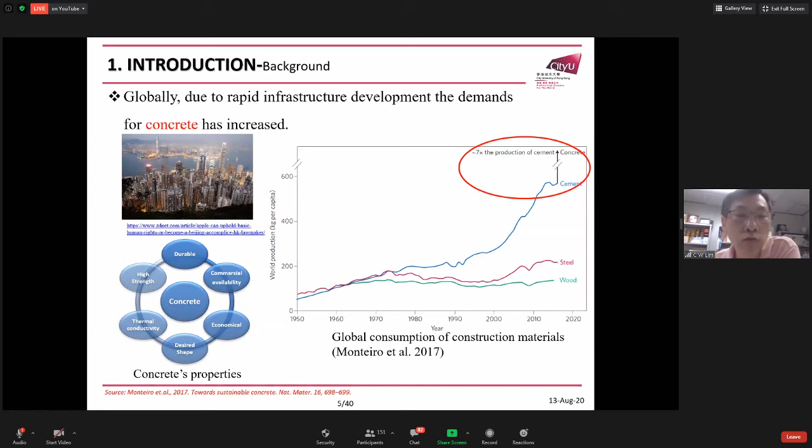Let me show you the world production of some materials - wood, steel, cement - and you can see that for concrete it is about 7 times more, as of about 2015. The reason concrete is used so commonly is because of its properties: commercially available, durable, high strength, thermal conductivity, desired shape, and economical effects. Particularly in Hong Kong and elsewhere in the mega cities of the world, concrete is one of the best and most important construction materials.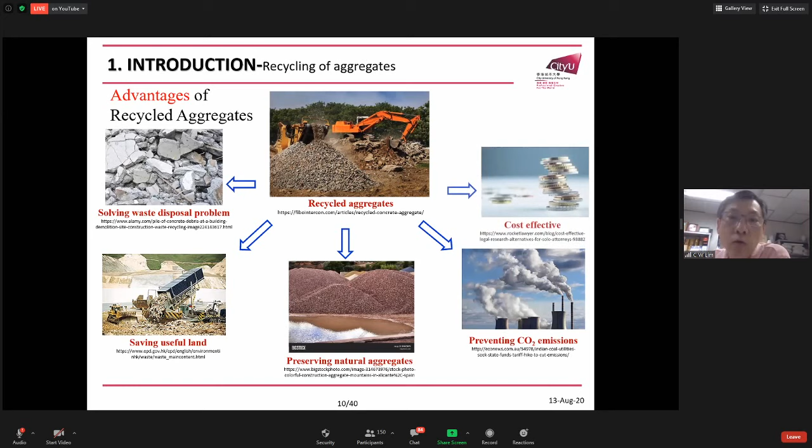For this reason, we need to think of a way of using recycled aggregates. The advantages of recycled aggregate include solving waste disposal problems, saving useful lands, preserving natural aggregates, preventing CO2 emission, and also saving cost.

In addition, recycled aggregate also has some limitations. On the other hand, it requires high water consumption. It also has porous microstructure, low mechanical properties, higher shrinkage, low durability, and low acceptance for structural concrete.

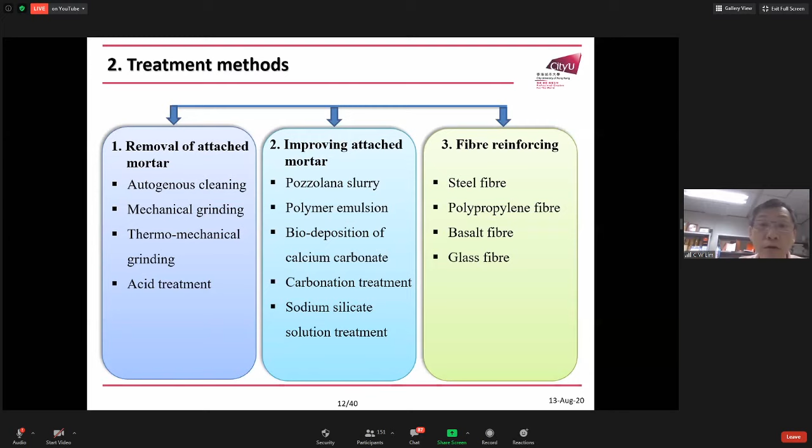This comes to the second part of my talk, about treatment methods. In this part, I will first introduce the method of removing the attached mortar, then improving the attached mortar, and finally strengthening the structure by fiber reinforcing. We will go through each one by one in brief.

The first method for removing the attached mortar is the autogenous cleaning method. The attached mortar is first removed by placing recycled aggregate in a rotating mill, which has a diameter of 300 millimeters and a depth of about 500 millimeters. It is collided against surrounding particles, followed by water cleaning. This method is less effective in removing the attached mortar.

The next method is the mechanical grinding method. The attached mortar is removed by crushing and ball milling, similar to the Los Angeles abrasion test of aggregates. Micro cracks appear on the surface of recycled aggregates, and mechanical properties and durability are compromised. So this method also has some limitations.

We may also modify this method by thermal heat treatment. This is the third method, thermomechanical grinding. There are two stages: first, the aggregate is heated to a temperature of 300 Celsius, then mechanically ground to remove the weak ITZs. It produces high quality recycled aggregate, but the problem is it demands high energy requirement because it needs heat treatment before grinding.

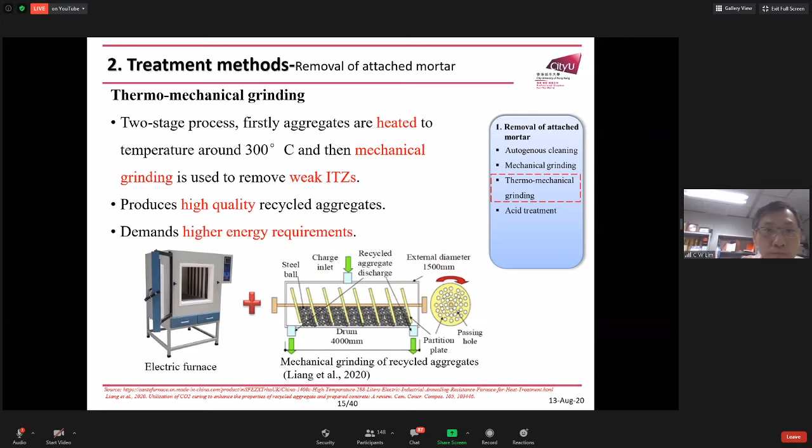The other method of removing the attached mortar is acid treatment. Various acids like sulfuric acid, hydrochloric acid, phosphoric acid, and acetic acid are used to dissolve the hydration products and weaken the ITZs. It improves the quality of recycled aggregates. Large-scale implementation, safety precautions, and high water demands are the key challenges. Of course, each method has advantages and disadvantages.

The other treatment method is improving the attached mortar. The first is pozzolana slurry. Mineral admixtures like fly ash, silica fume, and GGBS are used to fill the pores and reduce the calcium hydroxide content. It significantly improves the microstructure of recycled aggregates. It is environment friendly and sustainable, a sustainable approach.

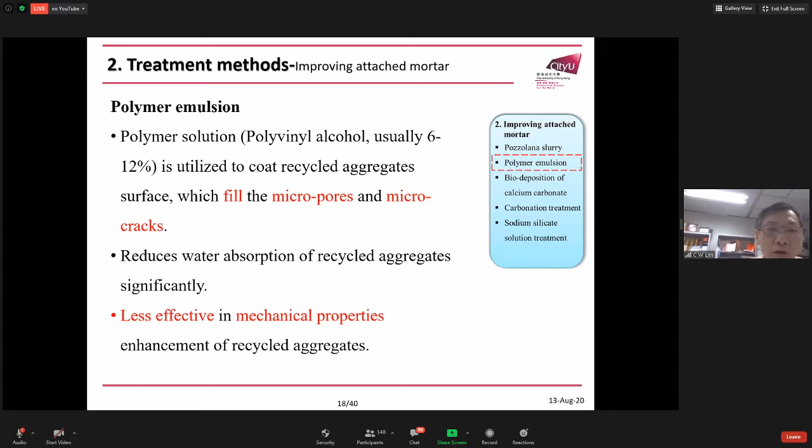The second method is polymer emulsion. A polymer emulsion solution is utilized to coat the recycled aggregate surface, filling micropores and micro cracks. It reduces water absorption of recycled aggregate significantly. However, it is less effective in enhancing mechanical properties of recycled aggregates.

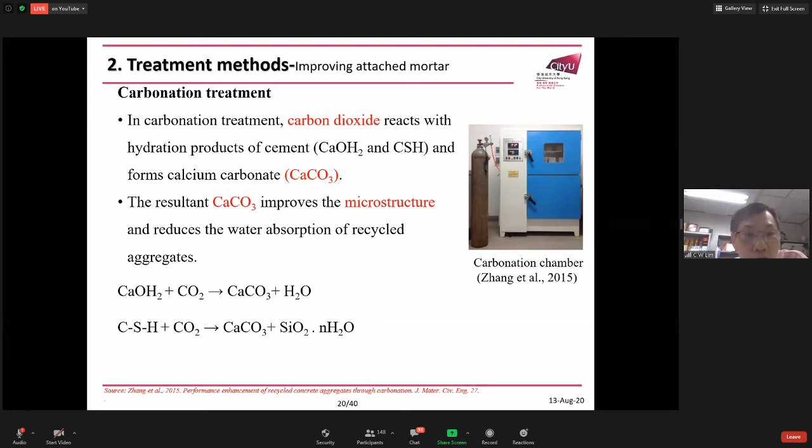One other method is carbonation treatment. In this case, carbon dioxide reacts with hydration products of cement and forms calcium carbonate. The resultant calcium carbonate improves the microstructure and reduces the water absorption of recycled aggregates.

The last treatment method for improving attached mortar is sodium silicate solution treatment. This treatment is almost similar to the polymer emulsion treatment, in which silicate-based solutions are used to coat the recycled aggregate surface. It is effective in blocking capillary pores, but less effective in resisting chloride ion penetration and water penetration, and it leads to higher alkali content in concrete.

Now we move to another treatment method, fiber reinforcement. We can use steel fiber, polypropylene fibers, basalt fibers, and glass fibers. The weak performance of recycled aggregates can be neutralized by using fibers that effectively bridge micro cracks, resulting in improved mechanical properties. Fibers, due to their small microstructure size, retard the origination and expansion of early micro cracks inside the concrete matrix. It improves splitting tensile strength, flexural strength, and ductility.

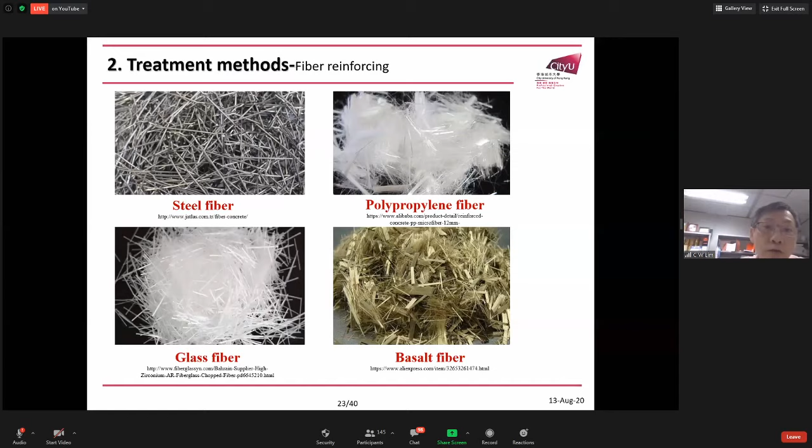So, lastly, in this talk, I would like to introduce to you the overall objective of the PhD project. In our PhD project, which is going to complete in the next couple of years, we intend to develop an effective, practically viable, and eco-friendly treatment method for RAC. We also intend to determine the optimum content and proportions of pozzolana

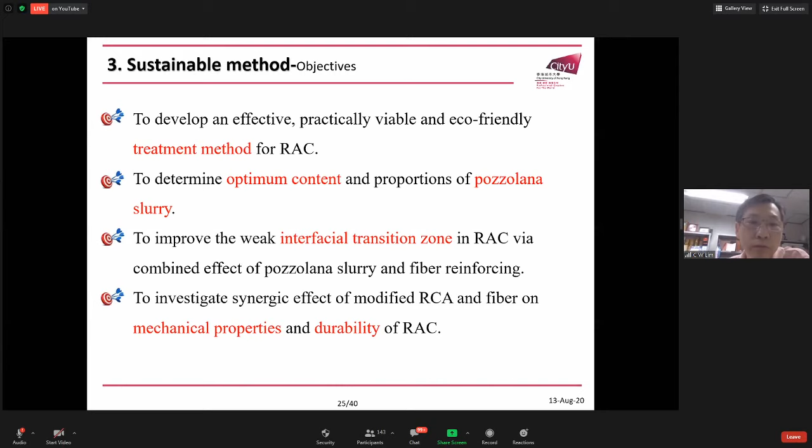slurry to improve the weak interfacial transition zone in RAC via combined effect of pozzolana slurry and fiber reinforcing. We also wish to investigate synergic effect of modified RCA and fiber on the mechanical properties and durability of RAC.

This is a very important issue in Hong Kong because we are short of land. We also wish to save valuable land for waste disposal in Hong Kong. This is very important. And we also wish to create new business opportunities for the RCA manufacturers in Hong Kong.

I wish just to highlight that at the end of the day, we wish to obtain successful utilization of recycled aggregates for structural concrete.

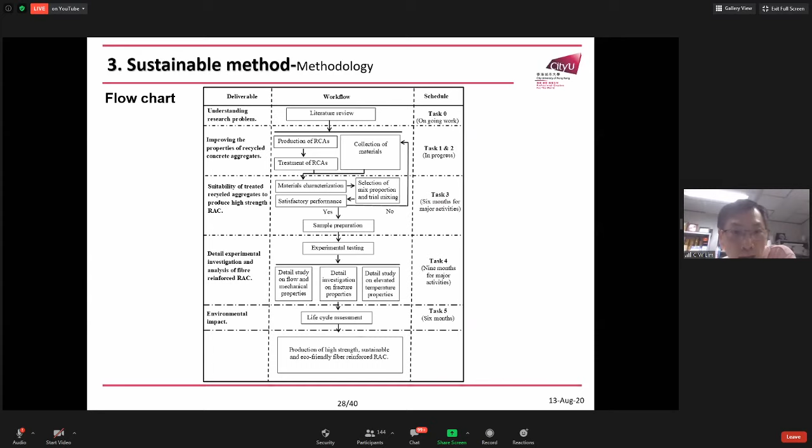The flowchart shows the flowchart of our work from literature review throughout the 5 tasks of the project, and at the end of the day, we wish to produce high-strength, sustainable, and eco-friendly fiber-reinforced RAC.

Before I end, perhaps I just want to introduce to you a little bit of fly ash in Hong Kong, as one of the speakers just now has already mentioned a lot, and also pozzolana reaction which is used in concrete due to its filling and pozzolana reaction capabilities. Fly ash is very common here in Hong Kong, and also we have the silica fume, which one of the speakers just now has also introduced.

And the method in our PhD project, there are 6 stages. First of all, stage 1 is to produce NAC and the concrete crushing, cleaning, slurry preparation, slurry coating, and finally characterization.

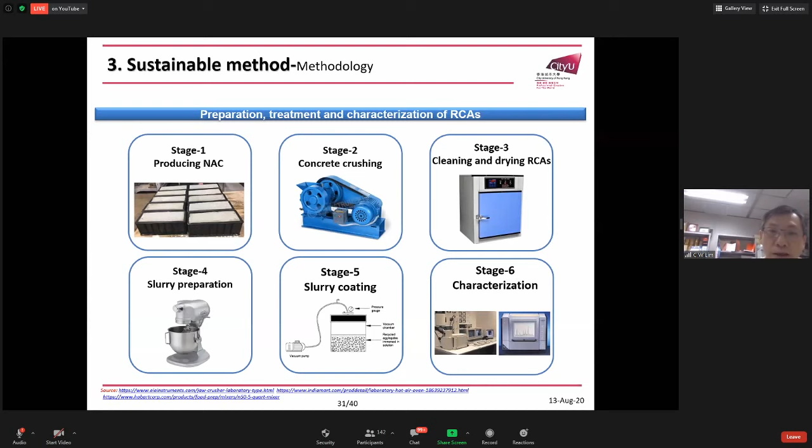And after that, we wish to do some tests to show that the result can actually be obtained and the objective can be obtained. First, we wish to do two types of tests. One is the flexural capacity test, which will follow the ASTM standard. And the second one is the compression test, which we also follow the ASTM standard.

Next, we will also do the split tensile test and also the impact loading test for the strength of the basalt fiber reinforced RAC.

In fact, we have obtained some preliminary results in this work. By using the mixed proportion of the pozzolana slurry, and also a binder to water ratio of 1:2, our preliminary result has shown that water absorption can be reduced from 6.03% to 3.72%. And the work is going on, and we expect to achieve further improvement.

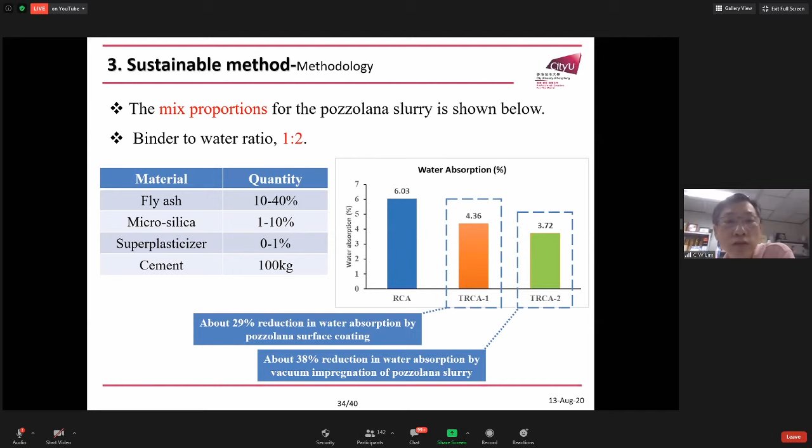Effective utilization of recycled concrete aggregates will help the construction sector in improving concrete sustainability, valorizing construction waste, and easing burden on landfill sites, along with fulfilling the demands of the present era.

The use of high-tech equipment, large-scale implementation, undesired results, and higher costs are among the few limitations linked to the traditional aggregate treatment method.

Pozzolana slurry coating is the most viable, effective, and environmentally friendly approach that, if combined with the fiber reinforcing technique, will greatly promote the application of recycled concrete in sustainable infrastructures.

In the future, we will test the thermal performance and fire resistance of a proposed basalt fiber reinforced recycled concrete. The successful utilization of treated recycled aggregates and basalt fiber will greatly improve the thermal endurance of concrete, and thus it can be applied in sustainable infrastructure.